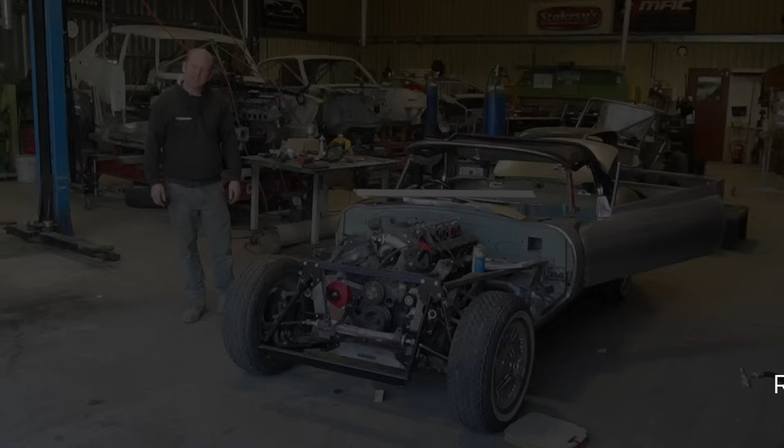We're going to start off with some E-Type today. Actually, we're going to quickly mention the lack of BMW E46 - we've got a gap because I am going to be trying to get working on the Reliant Scimitar very imminently. I was hoping to today, but in reality that's going to become tomorrow, so more of that next week.

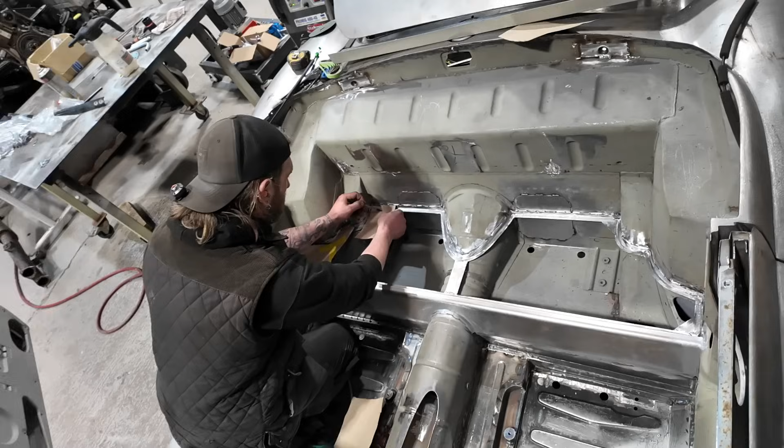E-Type - Matthew has been working in the rear seat area of this car because we've got to trim that area. There's no seats going there, it's just a trimmed area in the standard vehicle, and there's a sort of carpeted box thing that sits in there which doesn't look all that nice. We wanted to change that, add various other changes to that area, add some slightly more modern seat belts into the mix, and a bit of a sound system is going in there - an amplifier and an audio receiver, some speakers, and various other things.

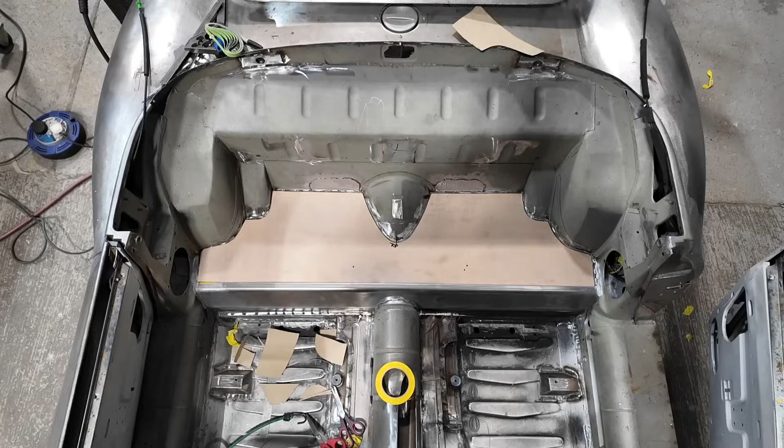So there's an area of fabrication involved there. Carl and I came up with a bit of a plan of how we wanted the front of that area to look and did a bit of a sketch. From that, Matt has fabricated the forward bulkhead to that little stowage area, that closed-in area, which would be where a rear seat would go if you had room, if you had people with no legs to go in there. Matt's done a beautiful job of fabricating the front of that.

He's then set a line around within the car using a laser set level to the top of the sills, because the car's not sitting level, but he set that level to the top of the sills to get the level, and then offset a line all the way around that area, and then welded in a return flange all the way around for a bulkhead to sit on.

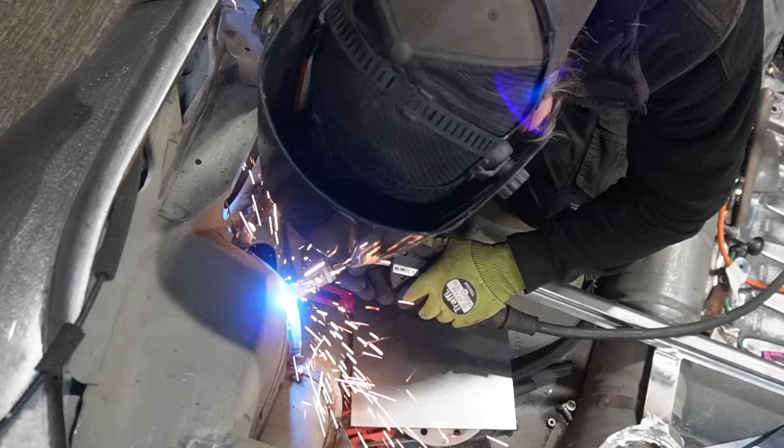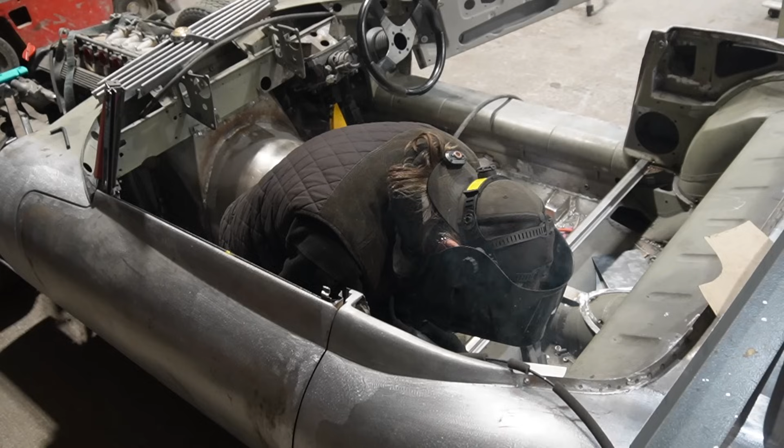He's then made a template for that bulkhead - made a cardboard template initially to get it roughed out, and then made that in some 5mm thick plywood, which is now the better template. That will be transferred in turn probably to some birch or hardwood ply, which will go in that rear area and form the actual final lid that goes in there that will be screwed in.

Then he has now revised the metalwork in the reinforcer gussets that kind of tie the back of the inner sill into the rear wheel arch. He's cut into those, and then we fabricated some quite heavy duty boxes into those out of 2mm thick steel sheet with 3mm thick reinforcing plates in to carry a seatbelt anchorage to carry the rear inertia reel units.

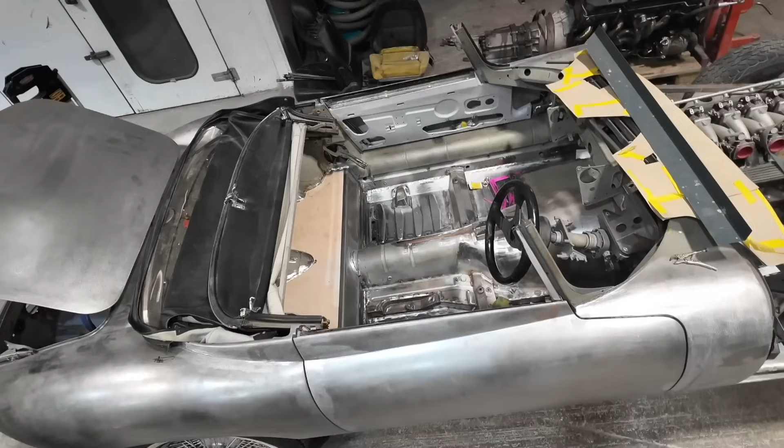These cars had a mishmash of seatbelt arrangements. In a very short period of time, they had non-inertia reel belts, lap belts, inertia reel shoulder belts, all of them fitted in fairly hodgepodge fashions, but they do have the lower seatbelt mounting points in. The upper seatbelt mounting points are varying degrees of unsatisfactoriness, if that's a word, which it isn't.

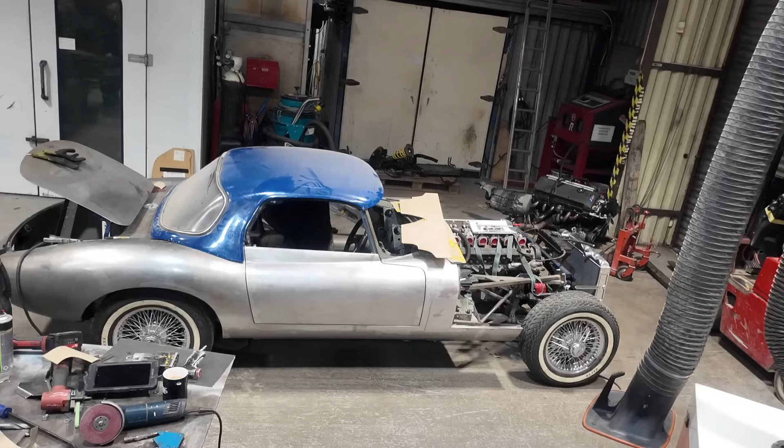So we are revising that slightly, and we are putting the inertia reels into that floor area, and then we're reinforcing the B pillar and adding a shoulder point there, because there needs to be a guide point there regardless. The inertia reel fitment points were a bit of a hodgepodge, and we've revised that, and we're fitting an upper shoulder point into the B pillar, adding some reinforcement in there.

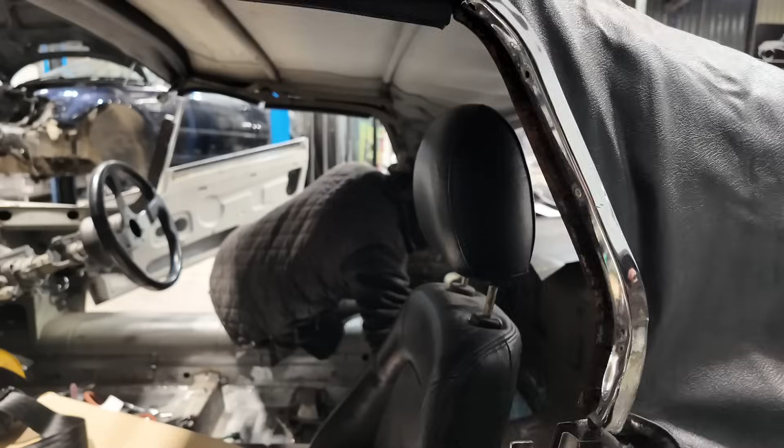We've got to be careful because the hard top also has a mounting point that goes in there, so we're fitting that just below where the hard top roof mounting point is, and we're having to avoid all of the soft top moving mechanism as well. So it's quite fiddly, but we think we've got a place where we can put that shoulder strap mounting point that we can reinforce to be of adequate strength, and that we can fit the inertia reels in a suitable place as well. It's all a little bit of a fiddle.

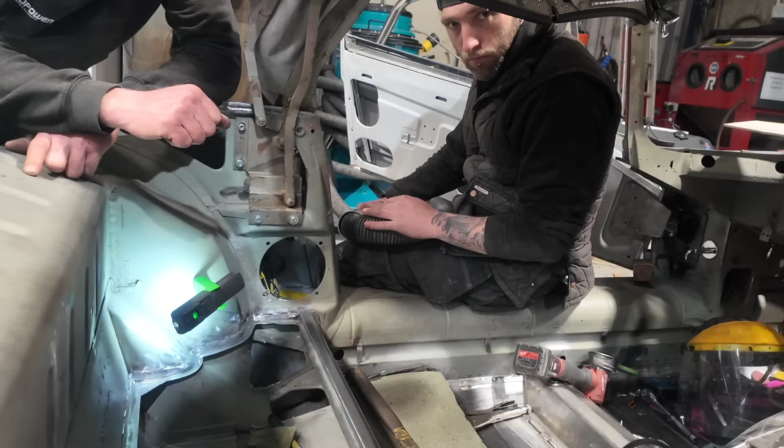I had to refresh my memory on pull test strength requirements for seatbelt anchorages. I've always had a number, I was saying to the guys upstairs, I've always had a number of 1.5 tons in my head, and whenever I've worked with these things - bear in mind this is largely fly-by brain cell design, not calculated generally on these things, because we're working with pre-existing structures, so they're very hard to calculate out properly.

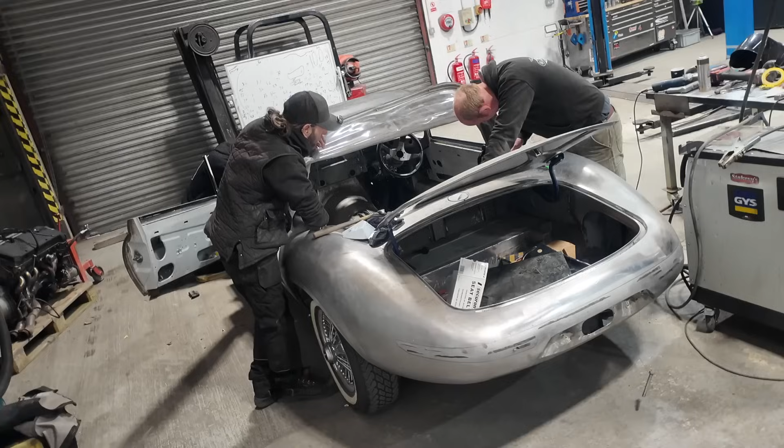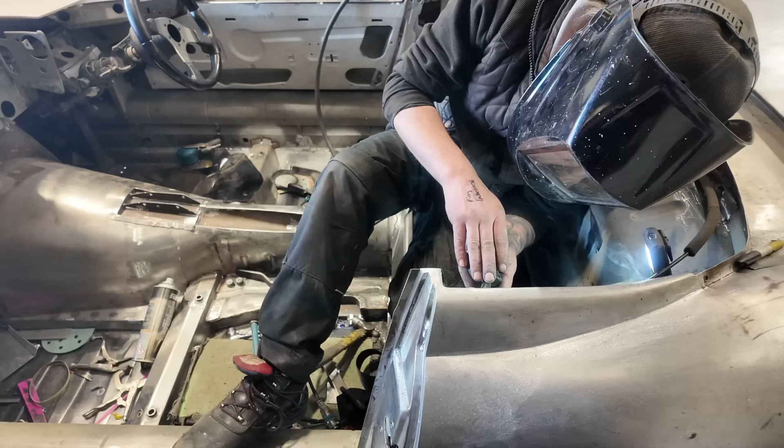I've always worked with 1.5 tons as a rule of thumb in my head, but I thought I better check properly on this. So I checked the EU type approval regulations, and I was actually slightly over - it's like 1,300 and something kilos pull test. It's an impact pull, so it's a sudden pull on the points.

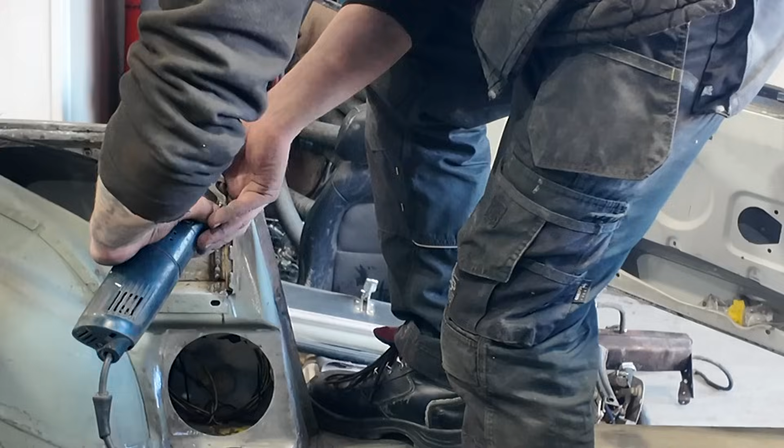The inertia reel mounts will be way higher than that - I'd say they'll withstand a pull probably upwards of 3 tons. The shoulder points, the B-pillars as they are, would definitely not withstand a 1300 or 1500 kilo pull. So we're adding a reinforcer at the bottom of that B-pillar, and some reinforcement at the top, which I think would enable it to take that sort of pull test.

Bear in mind, this is all a bit of a moot point in that the original E-Type is in no way designed to those requirements. The original body is in no way designed to any real crash test standards at all. You've got the roll protection afforded by the two hockey sticks at the front, and the car is certainly not built to modern safety standards.

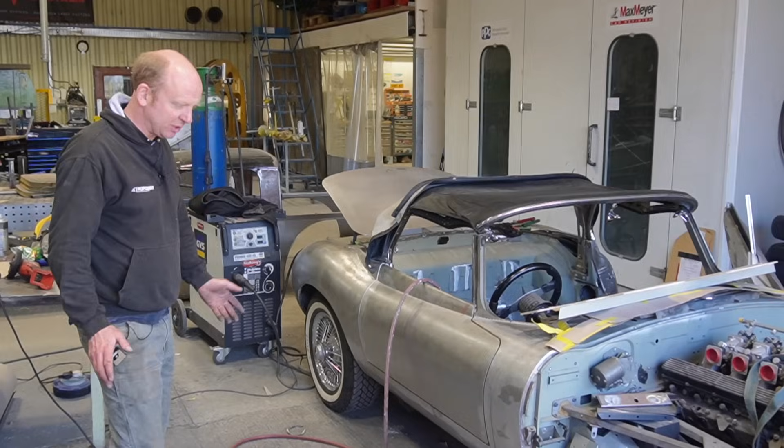But as I said to the guys yesterday, one of my thoughts is I don't want parts I'm adding to the car to be below par in terms of those safety standards. There's nothing to say what standard I have to do those points to, but my conscience says I ought to make them approximately what a modern type approval standard is. At least then I've done my bit - I may be limited by the vehicle around it, but at least I've done my bit.

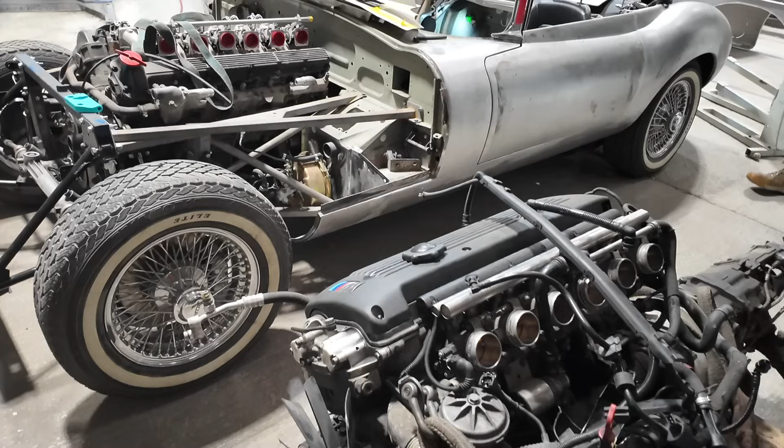So that's enough on that. Matt's doing some very nice fabrication there, and you'll see that develop as he adds the various further parts.

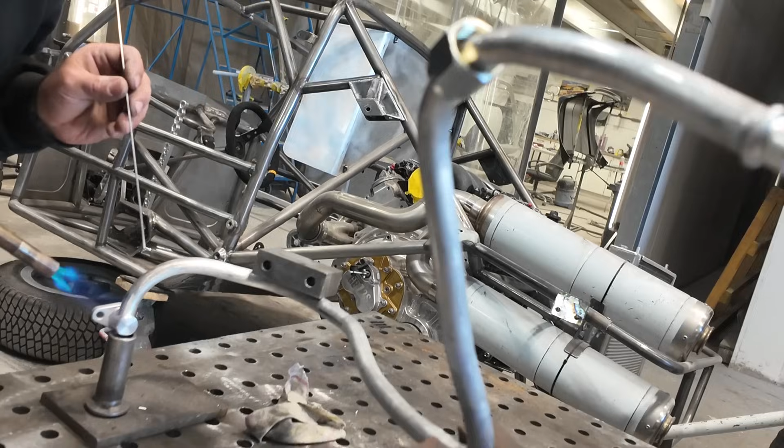Moving on from that, we come back to the Saab. Bobby is back - he's actually only just moved on to the Saab today because he's been finalising the aircon lines we talked about in previous episodes, and there's been some complications, not to do with his machine, but to do with the termination of the ends of those lines where we have to braze to them. We're on a learning curve, and Bobby's been doing research - we've discovered we're using a 6000 series aluminium for those lines, which is a readily available fabrication tube size, and I've generally used that for welded aluminium fabrications in the past.

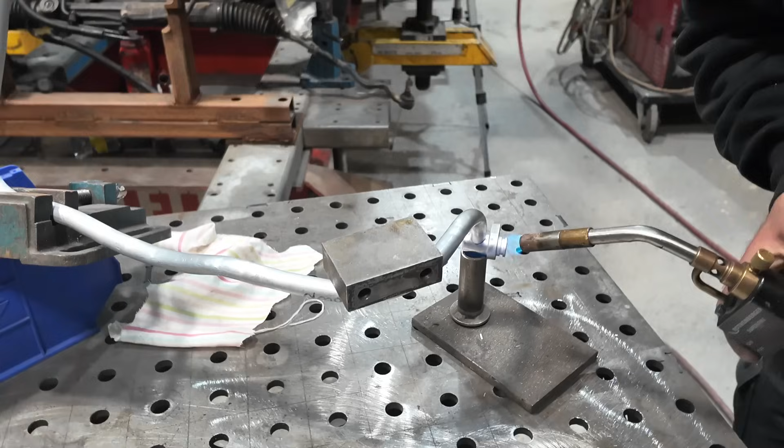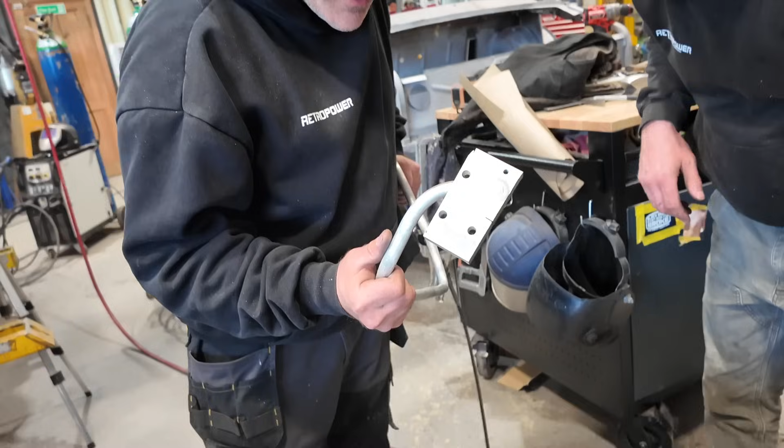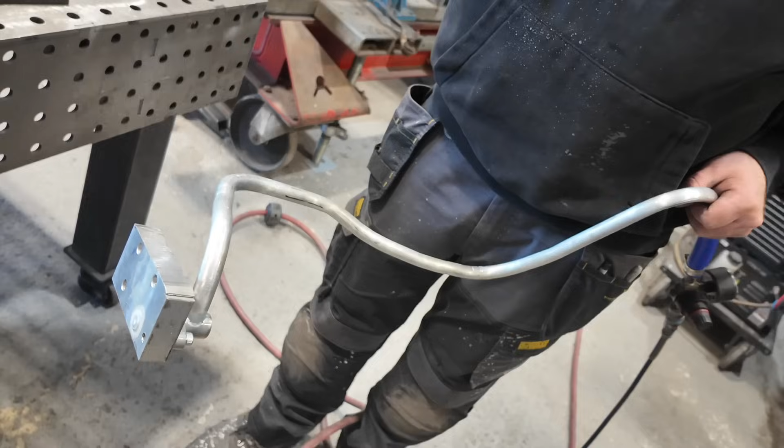What we're discovering is it's a bit of a pain to braze. We're using a zinc-based brazing rod designed for the refrigeration industry - Johnson Matthey makes some, and various other companies make them. Bobby's actually picked up off his own back, while he was having his teeth mended in Bulgaria, he'd done research and bought various zinc alloy rods designed for the refrigeration industry to trial, because one of the issues with the 6000 series aluminium is that magnesium comes out of solution and causes issues with the braze. This is one of the problems we've had - very, very tiny porosity, basically failing pressure test on outwardly perfectly good brazed joints, and he's had issues getting a repeatable good quality brazed joint on the ends of those lines.

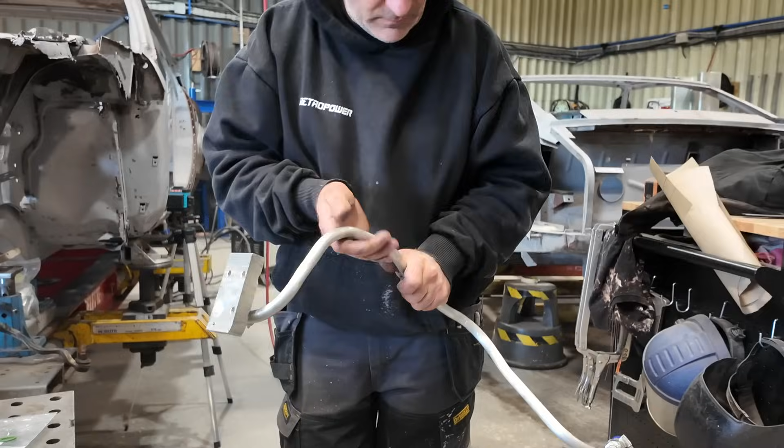We're talking sort of barely visible tiny bubbles forming at 100 psi pressure - very, very hard to find and very hard to get rid of. So we've been fighting a battle on that. He's fought the battle and won, but it's not a repeatable process yet, so that's something we still need to develop.

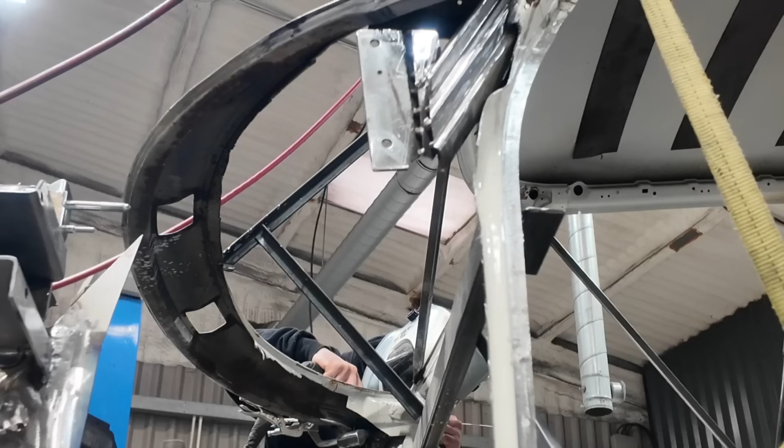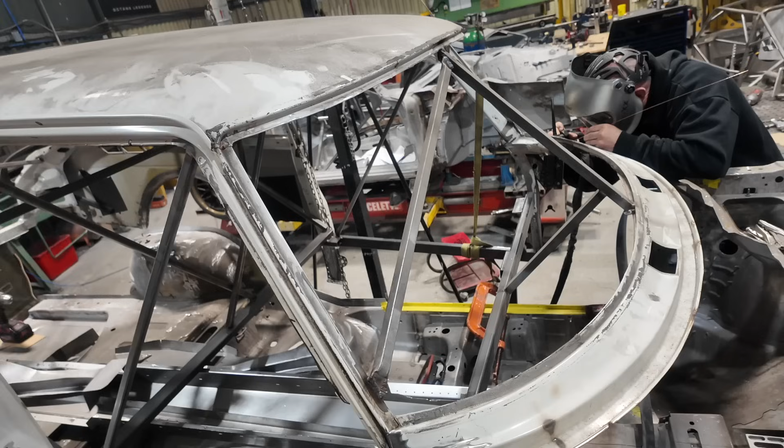Once that's fabricated on, move on to the next stages, which in broad and loose terms will obviously be finishing the pillar fabrication and the structural stuff that Bobby was working on anyway, and then determining where we're going to be flanging carbon fibre to steel around the quarter panels, removing the quarter panels, and then getting the CAD guys on with doing some more scan work so that we can basically sew in CAD the body surfaces to the mounting flanges for the rear half of the car. That'll be an exciting point to be at. So that's what's going on with Saab.

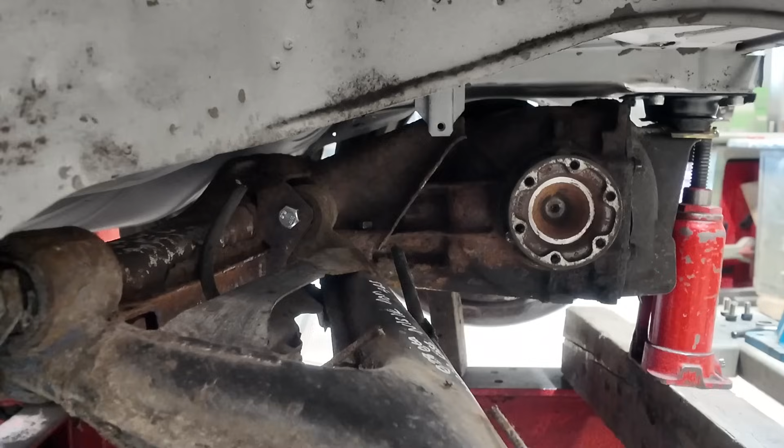E9: I think I mentioned last week getting the rear suspension components from Tim Pollock, which is good. We have those mounted, been a couple of to's and fro's and discoveries along the way, which I'm sure BMW gurus watching will say, ah yes, you will discover this. We've discovered that the mounting height for the 5 Series, E28 5 Series rear beam or subframe, that we're using is slightly different to the E9, so we need to put a spacer above the mounting bushes for that, which is not a problem.

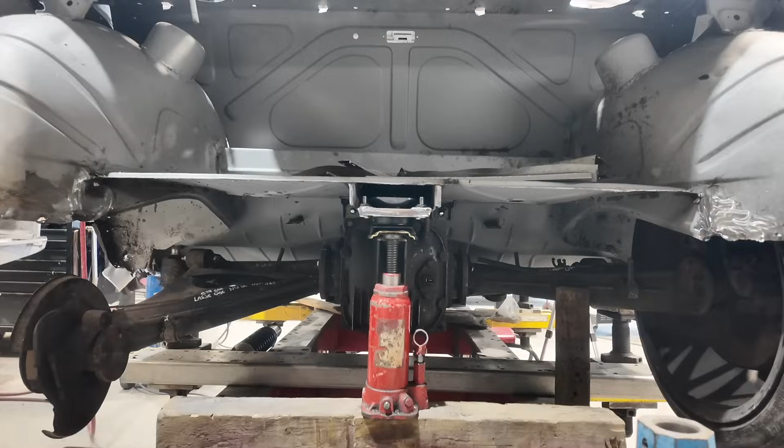However, it means that those mounting bushes are too long for the standard E9 rear subframe mounting pins, and I proposed that a good answer to that was to use an E30 rear subframe mounting pin, which is also common to many, many other BMWs, both large and small. It's used in various 7 Series. I think it might even be used in the 8s. It's used in various things.

However, there's a slight difference in the spline diameter where the splines that press into the body fit. Now we can get around that, but we need to check everything else works. We may have to make some little adapters and weld them in for the spline ends where they attach into the body, unless, leaning on the hive mind of our viewers, any keen BMW specialists in our viewership know of a BMW beam mounting pin that presses into the body that has the same dimensions in the body as the E9, E28 type pin, but has the length of the E30 type pin. I don't know if there is or not. If not, we can either make one or probably make a little adapter to adapt the E30 one to the E9 body. Not the end of the world either way, but it'd be interesting if there is an off-the-shelf part from BMW. I couldn't see one. It seemed to be one pin or the other, and there didn't seem to be a third variant as far as I could see for that type of fitment, but you never know.

But anyway, that doesn't really stop us doing anything. Stu's got that rear beam mounted, got it set to the height where it will need to be in advance of us making those spacer pucks that have got to go in. Got everything set up and got the swinging arm on this side set at ride height.

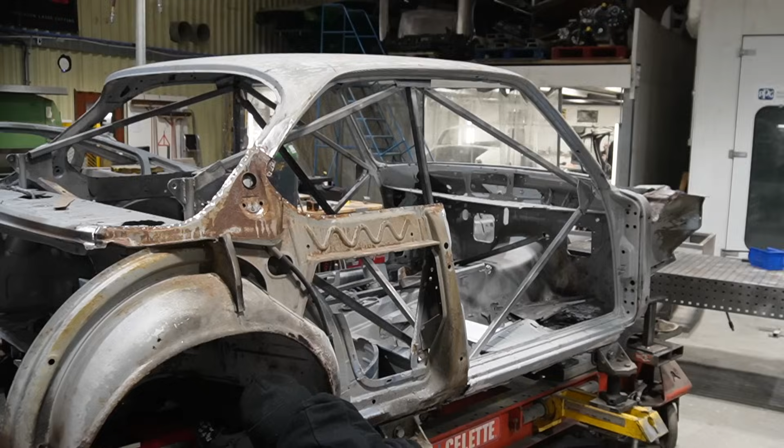He's just chucked one of the wheels off the E46 BMW on, got that set at ride height so that we can determine at ride height the exact wheelbase from the centre of the rear wheel to the centre of the front wheel. And then earlier in the week, went round and round and lost some more of my hair that I haven't got very much of. Stu hasn't got any left anyway, so he can't pull his out.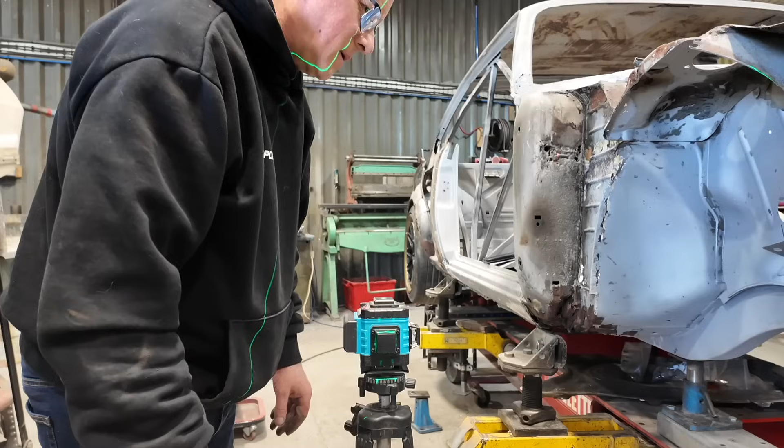We've worked out the exact positioning of the front axle centre line mathematically, using the BMW dimensions from the E46 to the structural points on that to get us the axle centre line, because none of the jig drawings I can find and none of the information anywhere online gives me the actual axle centre lines for the E46. I can get any body repair dimension I want, but none of them tell me where the middle of the wheel should be, which is a pretty fundamental problem, and I would have thought that should be in that information, but none of the jig drawings I can find have that.

But anyway, we've established that. Stu's marked it on the chassis, worked out where the subframe mountings have got to go to get the axle centre line in the right place, and then we can transfer that to work out exactly where the strut tops have got to go so we can start fabricating those.

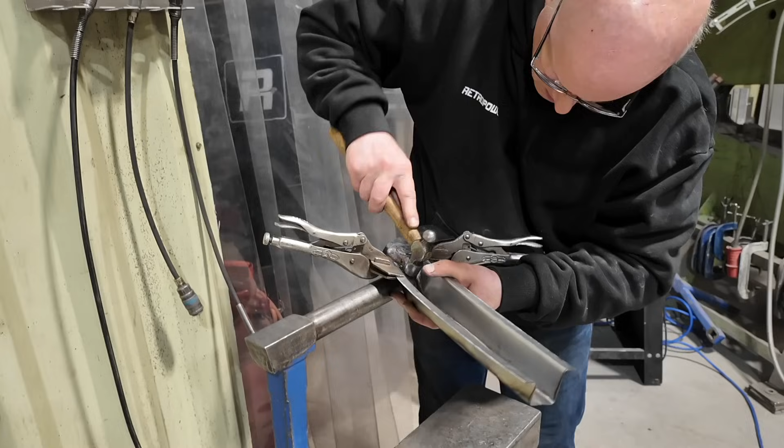All of that is great. Whilst waiting for parts to do some of those things, Stu's also moved on to repairing the rear inner scuttle panel, the panel at the bottom of the rear windscreen, which we're replacing, but the underneath panel we can't buy. And it just so happens to be the world's most complicated shape.

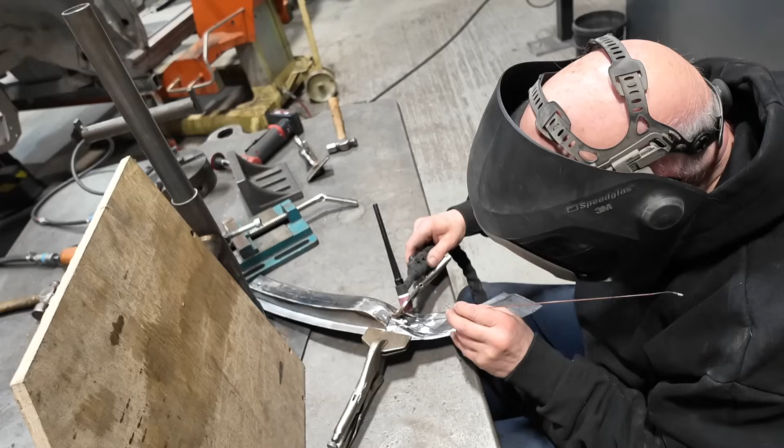I think it's probably, and I'm going to kick myself for saying this, possibly the trickiest shaped piece of metal on the entire car that we're going to have to make. Fortunately, it's only a reinforcer panel. It goes inside, you can't see it, so the exact accuracy isn't that important. All that said, Stu has done a very nice job of copying the shape of the original part, but it does look like somebody wanted to make some origami the day they designed that bit of metal, considering it's just a drain channel and reinforcer piece.

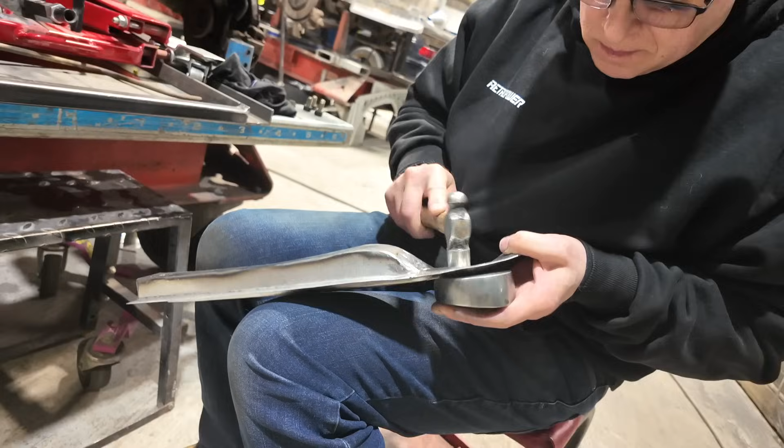But Stu's done a lovely job of making that piece. I don't know if he's actually welded it in yet or not. Looking at the car, by the staining I can see from here, I think he probably has welded it in. But yeah, he's got that piece done, certainly ready to weld in if it isn't actually welded in.

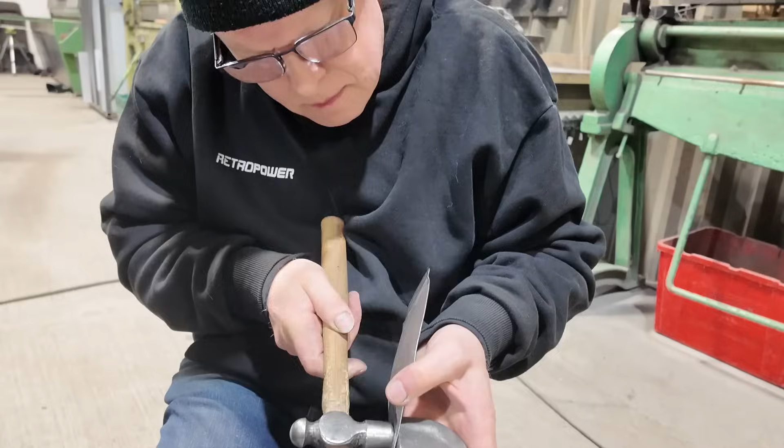And we are still waiting for panels because UPS, who are delivering those panels, their parcel delivery centre appears to have a floor set of two feet of treacle, and they don't actually seem to be able to move anything on and get it to us. It's sat at UPS, has been sat there for around a week, and trying to get motion out of that parcel appears to be very difficult.

So hopefully we will have some panels very soon. If UPS come along, please deliver the parts. They're all paid for, customs charges are paid, everything's dealt with. For some reason, it seems to be impossible to get them here. Hopefully they'll be here soon. And that's where we're at on the E46.

The Aston, there is nothing to report this week because of CAD things and because of me needing to do things which I have not had time to do. I basically need to review drawings. Cal and I need to review drawings.

However, we're doing some very exciting things related to Global Workshop at the moment as well, which I don't know if Cal's going to talk through with you. If he doesn't, we will be doing at some point soon. But yes, there's lots of planning of things at an overall level going on. And that's been absorbing quite a lot of our time, so we've been a bit limited on time to review drawings and do things like that.

The other job I've been doing, which is again not related to that and not related to things here, is a few jobs for the den to get caught up with some fabrication work there. As you're aware, the cut-off line we have on work at the den is that we do not do fabrication work on site. That is the line we've cut off. It's a very simple line, so we will not take on welding, rust repair, that type of work at that site. That's an agreement,

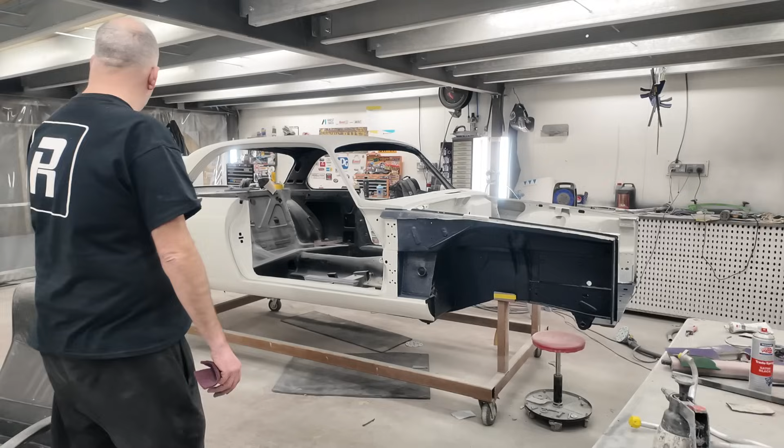Also, me and Gaz have been on with the Jaguar, so this is the final bits now. We're just doing all the detailed stuff. This is 320, we block this, 400. That's ready now - we've just got to go around, check everything, check for stopper, like some little pinholes, just make sure. Check it over. I think all the panels are ready apart from the back panels and the wings, and then it's like sealer time in the booth and then paint. So on that note, I can't say anything else more, so see you next time.

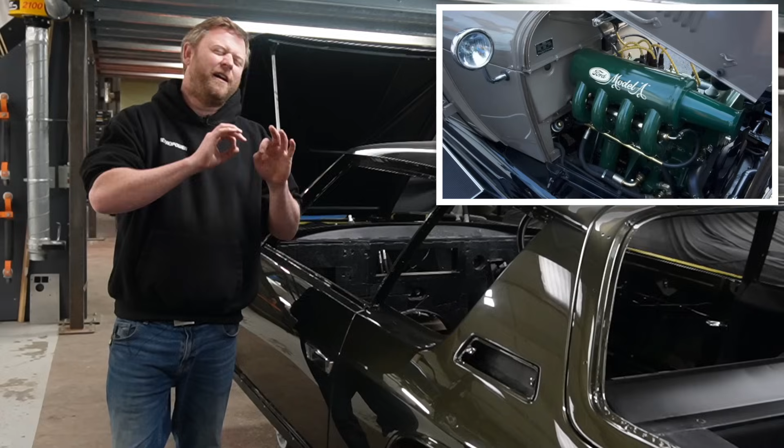Then moving on a little bit, there was a Model A Ford built by a company in Finland called Mäkelä Auto Tuning. I think it was built for Juha Kankkunen, and it's absolutely incredible. It's totally done to look like a Model A, but it's essentially like Group 4 running gear, a BDA in it, but made in incredible detail to look like an old flathead 4-cylinder. It's got this amazing fabricated airbox. The plug lead tubes have got a fake spark plug on the top, so it looks like it's got old school spark plugs sticking out the top with the wires screwed on. Dry sump tanks in like the leather luggage rack on the back. It's just an incredible thing. So I'll put a link to that in the description.

Probably more recently, Roadster Shop's Grand National build - seems to have been a spate of Grand Nationals built in the States. More recently, Ring Brothers did an absolutely awesome one, and the Dutch boys did as well. But Roadster Shop kind of led that little trend, and particularly the interior on it is just a masterpiece. At a glance you're just like, yeah, it's a standard interior, and then the more you look, the more detail you see, and the lengths they went to with things like the displays and the graphic design on them - it's just an absolutely stunning build, one that's really understated in a way. So yeah, those were my 3.

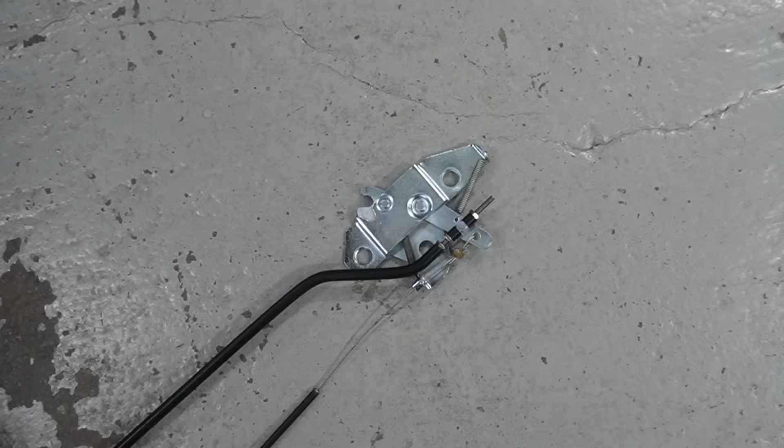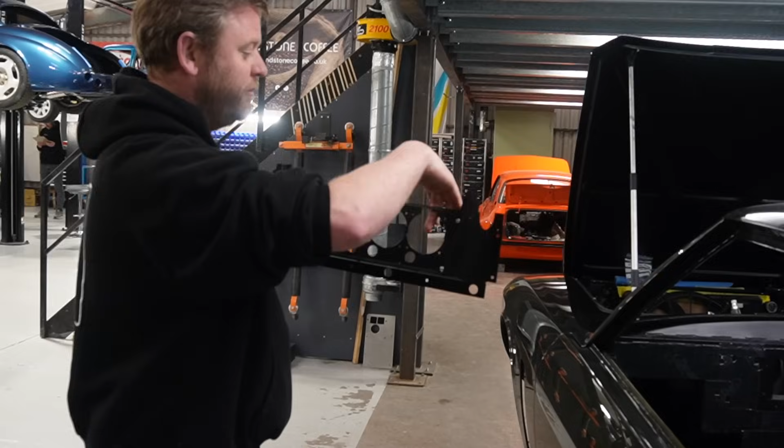Right, Interceptor. So we're just cracking on with assembly work on this. We've got the bonnet latch assemblies now in - we've zinc plated the actual latch mechanism, and then there's a link tube that goes between the two, which has been Xylan coated. We're looking at some of the air ducting fitment now, so parts that we made during dry build. So this is the plenum that goes on the inside of the bulkhead. There's a 3D printed adapter that adapts to the central 2 vents, which are fresh air straight from the scuttle, and then there's more 3D prints that adapt the outer 2 vents, because these are going to have the Bentley organ stop vents in them, that adapt them to the HVAC unit. So starting to get stuff like that in place.

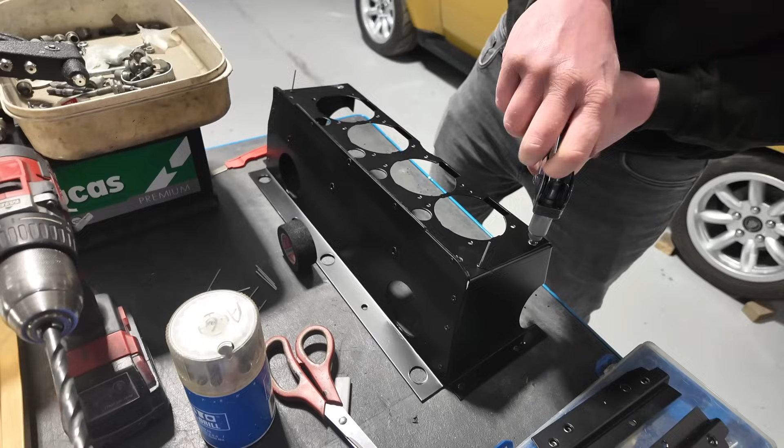That'll allow us to get the scuttle vent in, and then we can get the duct that we've got - there's a fabricated duct that sits under here, we can bolt that in. The wiper mechanism's all in now as well. So yeah, it's just starting the build-up bit - it's kind of the fun part when you're bolting shiny bits onto a shiny shell. So that's Interceptor.

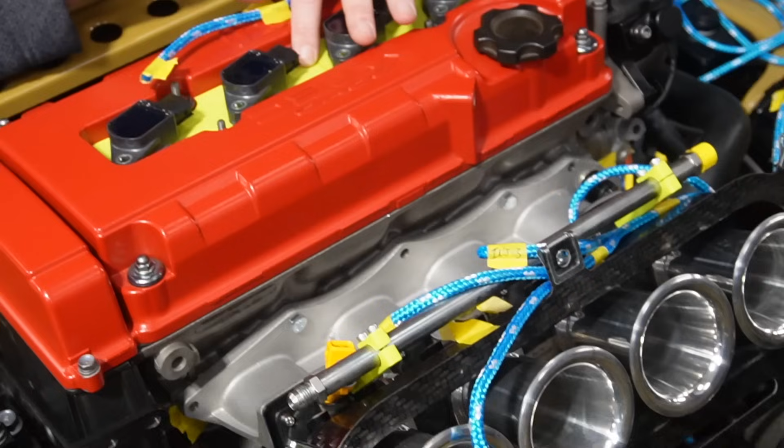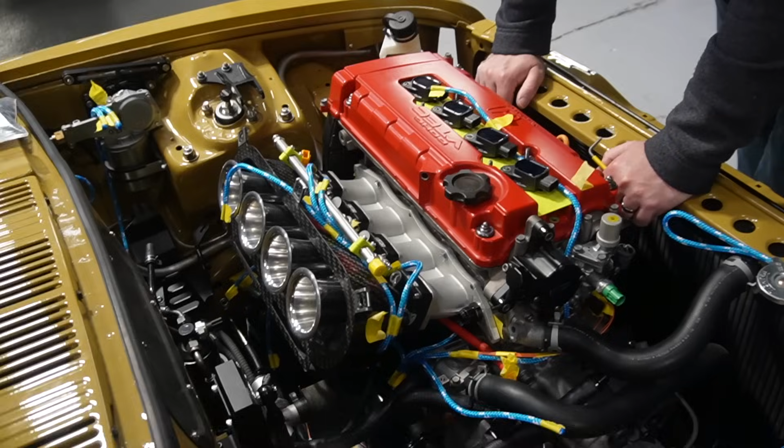People will have noticed that Bobby was missing the last couple of weeks - don't worry, he's just on holiday. He has been doing the air conditioning hardline fabrication using the crimp tool of his own design, and it's strangely therapeutic.

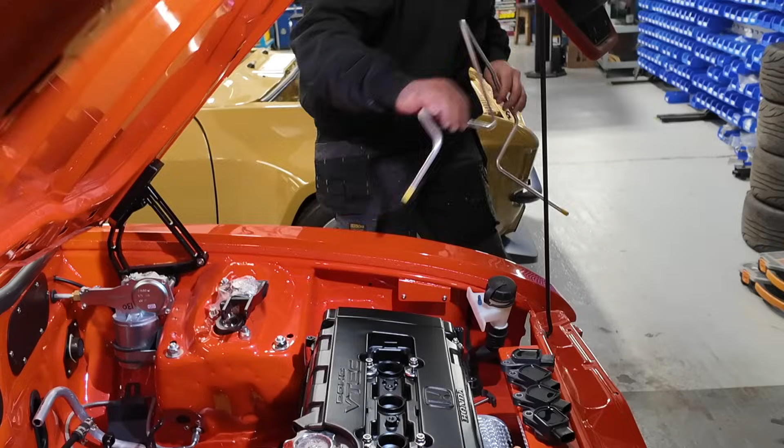Well, thank you, Bobby, for your therapeutic hardline fabrication. What other channel gives you such a thing?

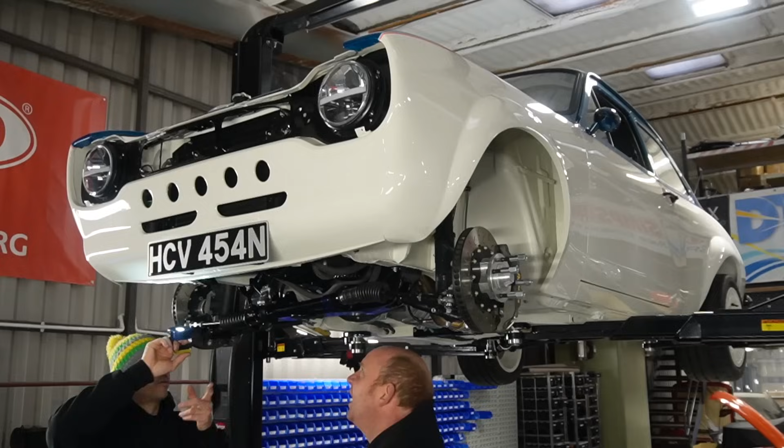Right, Project Kuma, we're just in the spanner checking stage. So we got the engine and box back in, ran that up, dropped the coolant out, ran it up to try and get any remaining oil residue out of there. The oil cooler we tested outside of the radiator because it's got a water to oil heat exchanger in it, and that didn't show any leaks. So we can only come to the conclusion that there was somehow oil contamination in the coolant, and we don't know why, but everything does seem okay now on that.

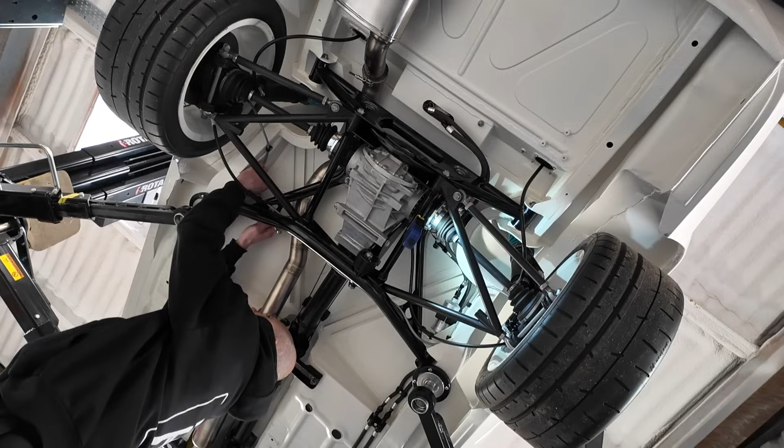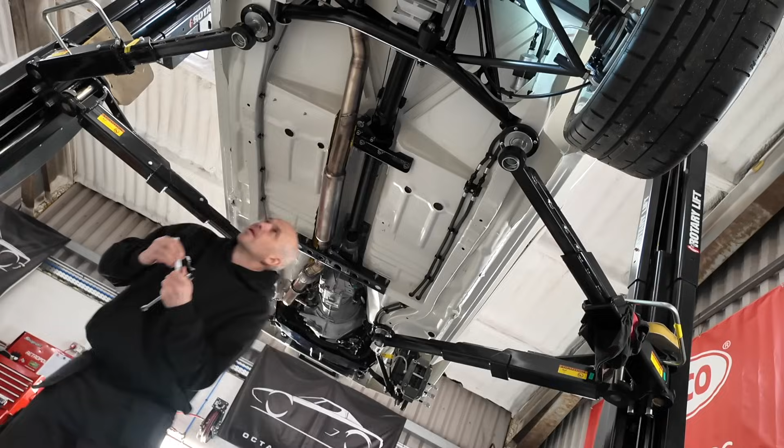So we've run it up to temperature again. We're just going through doing the final spanner check. In the very latter stages before road testing, we have a check sheet, and any safety critical fasteners are checked by two independent individuals and ticked off. They have a sort of colour coordinated paint marking system on the bolts, which can then be referred to later to see if there's any movement, but also to show that those bolts have been checked. Everything's photographed as well with those paint marks on, so we're just going through that process now with a view to road testing. Very, very close on that.

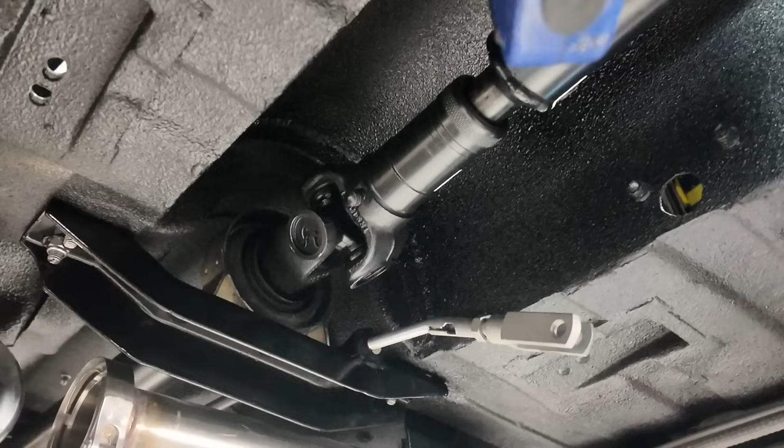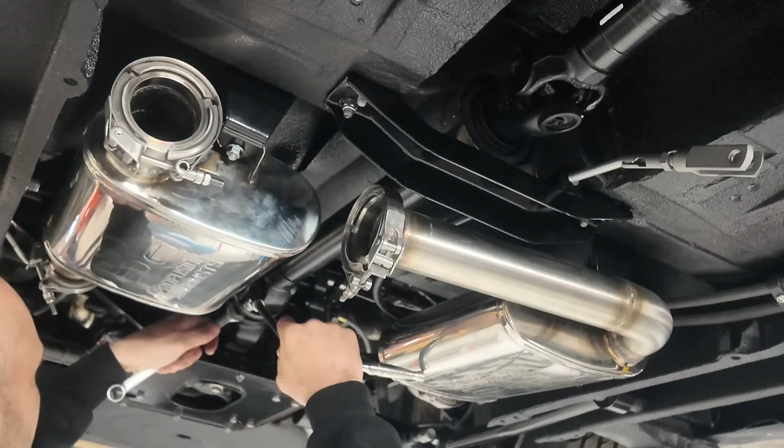And then Project Churchill, we've just had the prop shaft back from being made, so the driveline is basically complete. I can't spin the wheels anymore, they are attached to the transmission for the first time. Zircotec are just about to do the ceramic coating of the exhaust manifolds for this, which will then allow the whole exhaust system to go in, at which point mechanically we are getting pretty close. We need to have the coilovers made still, and obviously the final wheels, but yeah, it's good progress on that.

Moving on from that, I've been thinking about CAD then. George has largely been on with the Aston DBS chassis, going through all the final tweaks and changes. Fair credit to him, he has designed an entire chassis and all of the suspension, drivetrain and all the related parts - it's quite a big task, so it's easy to miss things. At this point in proceedings, Nat and I basically go over the drawing, look at the model, and try to brainstorm any things he might have missed because there's so much to think about.

So I've done a review of that chassis already. He's gone back and done a load of changes on it. Nat will now do a review as well from his point of view, so we bring two different points of view to it. Mine will be more of a mechanical assembly mindset and his will be more of an engineering mindset. He'll be looking at things like material thicknesses, load paths, that sort of thing, and I'll be looking at it from a can we physically put it together point of view, largely.

So following my review, there were a few changes, a couple of things that spring to mind. We realised on the front wishbone, I think it was the lower wishbones, you wouldn't actually be able to fit the bolts. They're fitted in the model, but one of them at least didn't have a path to actually get it out because there was another reinforcer plate behind it. So I made some revisions there. The diff basically goes up from underneath - there's two bolts in from the front, one in from the back.

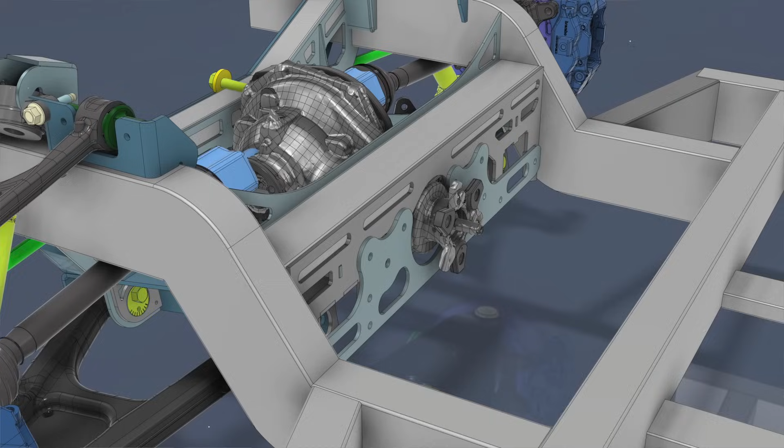I was concerned that the chassis was dead flush against the mounts, and any powder coat buildup or discrepancies in the exact dimensions of the chassis could make it incredibly difficult to slide that diff up into place without damaging paint. So we decided to kick out the chassis section behind it and give it a few mil clearance, then have a shim in there. You put the diff into place, put the front bolts in, then put the shim in and the final bolt at the back, so if it's fractionally tighter due to slight discrepancies during fabrication, we can just resize that shim. That was a good move.

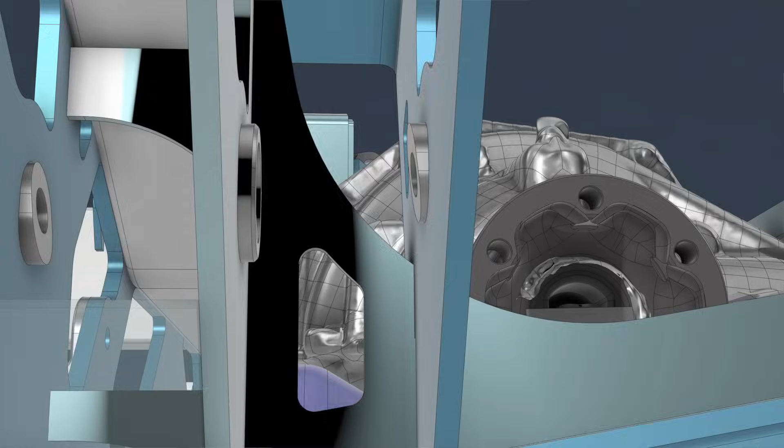We've also decided to change the rear suspension arm mountings so we can use either C6 or C7 rear end parts. This has generally been based around Corvette C7, but we realised the upper ball joint on the C7 rear upright is incredibly close to, or probably slightly touching, a 17-inch wheel, which is what we're hoping to use. The client wants to avoid the hot rod look and keep it fairly classic. Having done a few renders, going over 17-inch starts to look too hot rod. It's an option to go to 18 on the back, but we'd rather go with 17s.

For 17s we need to use Corvette C6 parts, which are very interchangeable, but one of the location arms mounts in a different way. We had a look and realised that with a few changes, we could make it so the parts interchange and fit either C6 or C7. So our intention is to build it with C6 - we've got all the C6 uprights and arms - but it leaves the possibility of upgrading to 18-inch wheels and using C7 parts if, further down the line, we decide to supercharge the engine for more power, want bigger brakes or stronger parts. We have no concerns about using the C6 stuff with the specification as it stands. That was another change.

So Nat will be reviewing that next, and then we're going to be sending a lot of parts for laser cutting and starting to build an enormous Airfix model. Luke's been on with a couple of things.

We've just been revisiting the front end of the E-Type, chopping and changing ideas regarding the air intake at the front. On a Series 3 originally there's quite an ugly, boxy scoop under the front, and we want to maximise the amount of air going through the radiator without compromising that intake. We also need air intake at the side, outboard of the radiator, to feed the engine air. Originally that air is kind of stolen from what goes through the main grill aperture, but we want separate intakes, so all the air through the main aperture and whatever scoop we come up with goes through the radiator, with additional intakes for the engine air.

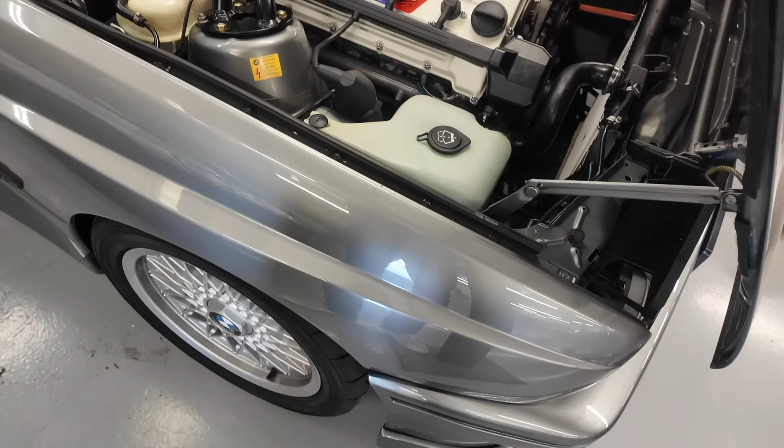So the E30 M3 is awaiting some parts, but the inspection on that was more or less as we expected - the thing is absolutely pristine, but there were just a few little things. There was a perished exhaust hanger, the belts could do with replacing - not mega urgent, but that's one thing the client mentioned he'd like doing. There was a little bit of wear on the dizzy cap and rotor arm, so we're going to do those as well. We're just waiting for some BMW parts.

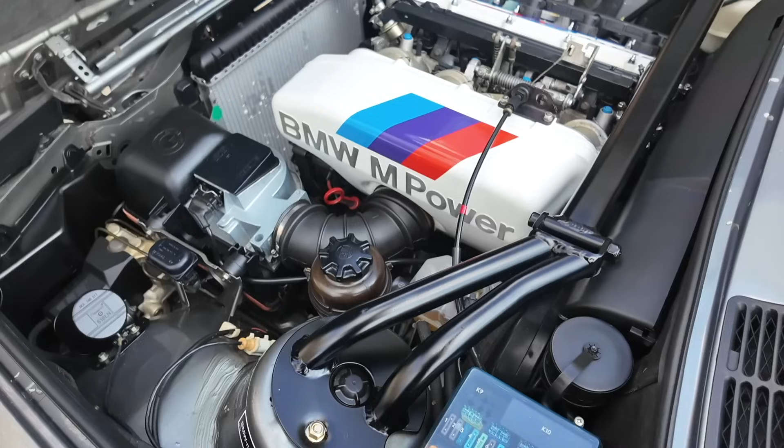There's also a sort of gripe amongst E30 owners who are at the fussier end of the scale, myself included, that the stereo originally sits just mounted flush and doesn't look like a very integrated part of the fascia. There's already an existing, I think 3D printed, version of that part of the centre console you can get that allows the stereo to sit a bit more recessed. So I think the customer's got one of those on order, which we're going to fit. But yeah, it's a relatively small job list on that.

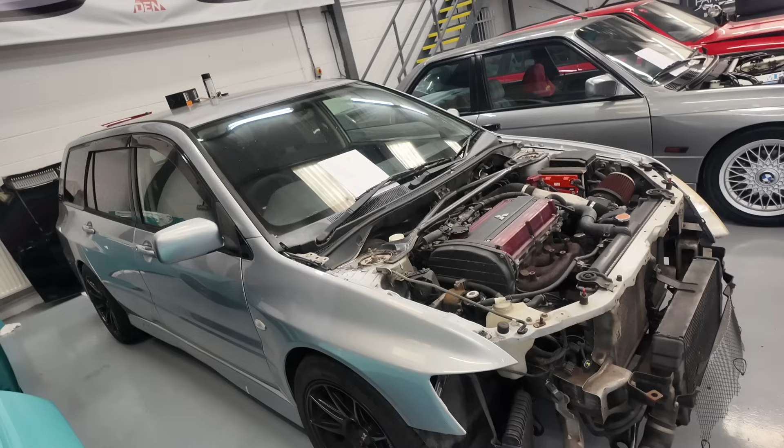Next to it is this Mitsubishi Evo wagon, which is Nick's own car, which he's bought, I believe, to do some work on, possibly sell at that point, although I can guarantee by the time he's done all the work on it, he's going to actually want to keep it. What he thinks is he's going to make a profit on this, or at least that's what he's told his wife. What's actually going to happen is he's going to find a string of problems on it, because it's quite obviously not been used that much, and he's going to pile more and more money into it, and eventually make a huge loss.

But incredibly cool car. I did a little teaser on the rear of this the other day, guess what car it is, just a little vent that sits next to the rear light. I love the look of these - I actually prefer the look of the wagon to the saloon, and they're just not a common sight, so it's very cool to have that in the workshop. There was another one doing the rounds around here, I used to see it on the road every now and then, and every time I saw it I was like, oh, I really want one of those.

So that's that - Mark III Golf. A few bits going on with this. The customer's decided he wants to tidy up the engine bay a little bit. The aluminium cam cover is just a little bit scabby looking basically, so we're taking that away. We're going to bead blast that at Retropower, clear Cerakote it, which should make that look brand new.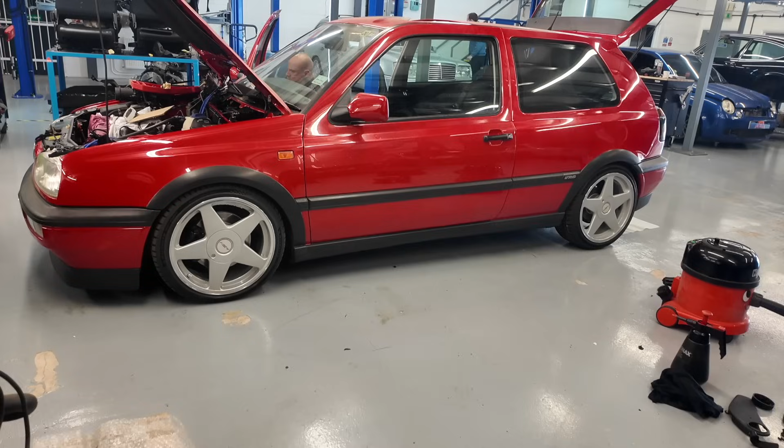It's a really good tip actually, that there's a Cerakote product which is specifically designed to go over bare aluminium castings and completely preserve their look, so they still look like a bare aluminium casting, but you don't get that surface furring with moisture that you get over time, that for instance the engine bay of Nick's Lancer has.

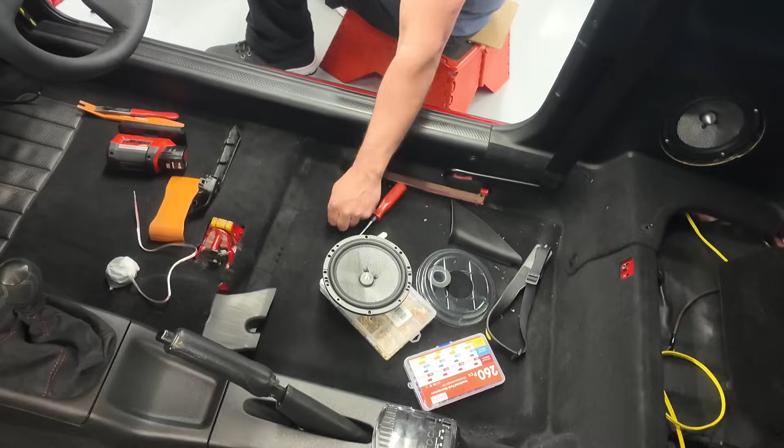Audio system going in, so I think we've got Focal 6.5 inch components in the front with the tweeters going into the original locations in the dash, and Focal 6.5 inch components in the back. I was actually quite surprised to see, and it's a very cool feature on these, that they had originally a tweeter mounting position in the back for the rear seat passengers as well, which is something you do not expect to see on a car like a Golf. We're making use of those, and then it's running a Pioneer amp and a very small active Pioneer subwoofer in the boot to try and make the most of that installation.

There's a lot of sound deadening mat going in, which Luke's been working on. Looking forward to seeing all that go together, and then we'll have the new seats that the customer's given us to fit in this. It's going to be this is definitely one of those cars, as with several in here, where when it's done, I'm going to be like, yeah, I really want that car myself.

And then the Mercedes, which is about ready to hand over. Nick's had it on here to do the alignment, and he's just got to do a final road test on this. But as a bit of a project recap, because it's quite a cool example of what we can essentially say yes to at the den.

And originally it came in for a reupholstery, so it was full leather originally. Customer wanted to change that, wanted to go with an original OEM Mercedes cloth, which we managed to source for him on the seat centres, then extend that onto the trim panels on the door cards and dash, which were originally wood. Then on the centre console, he wanted to change from the original wood to a satin black painted finish, which we did with a clear matte lacquer, so it doesn't scratch easily.

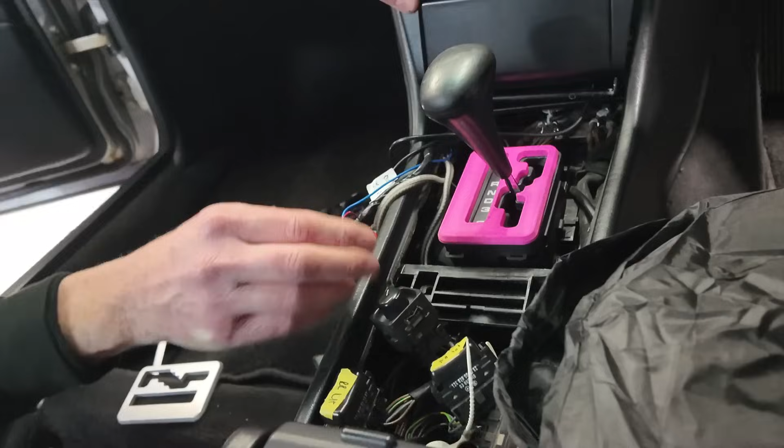And then a few little things. We noticed it had just come here fresh from an air ride conversion, and the controller, airlift performance controller, was just kind of on the seat on the end of its wire. I said, it'd be cool to have that in the ashtray, and he said, yeah, that would be really cool. So we did a little work there, installed that into the ashtray, designed a 3D printed part, so now you pop the ashtray open and that comes out, has the airlift controller on there. You can reconfigure those controllers to work in either orientation, so originally portrait, but we've changed that to being landscape.

And then, and this was a cool one, gear shifter, originally wood. He decided it would be really cool to have a green malachite ball as the shift knob. So he actually gave us a box with some of those gear knob balls in. Nick perilously did some diamond core drilling to drill a hole into one to bond a thread into it. And then we at Retropower designed a stick that was then machined by Andy at Concept 303 out of stainless steel, which had a little bit of a kind of, if you like, tulip flare at the top, so we could get a bit more area supporting the ball and actually bond it as well, so we weren't entirely relying on the threads. Got all that installed.

Also the gear sort of shift gate surround, which was originally wood as well. Customer said, could you machine that from billet? And yes, no problem. So we designed that, drew that up, had that machined, anodized, put that in. So now it's got some really, really cool touches inside.

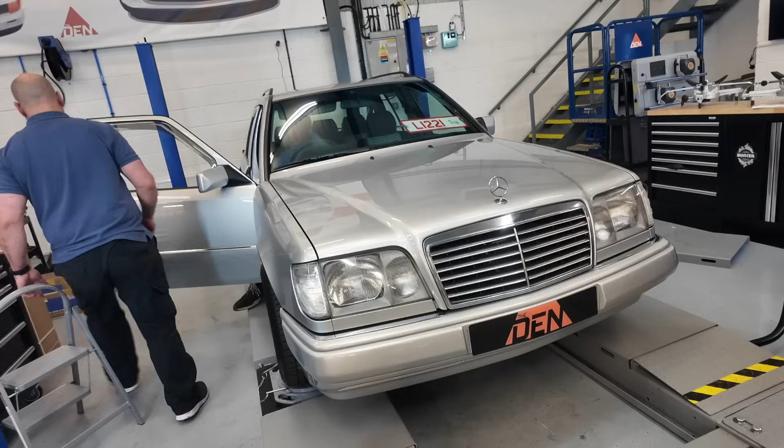And then while it was here, there was various mechanical bits to go through on the car as well. So some of the exhaust was starting to break down, so it's got a new OEM Mercedes middle box. We've done a modified rear with a Lorinser tailpipe on it. We've fitted the Lorinser wheels that he supplied.

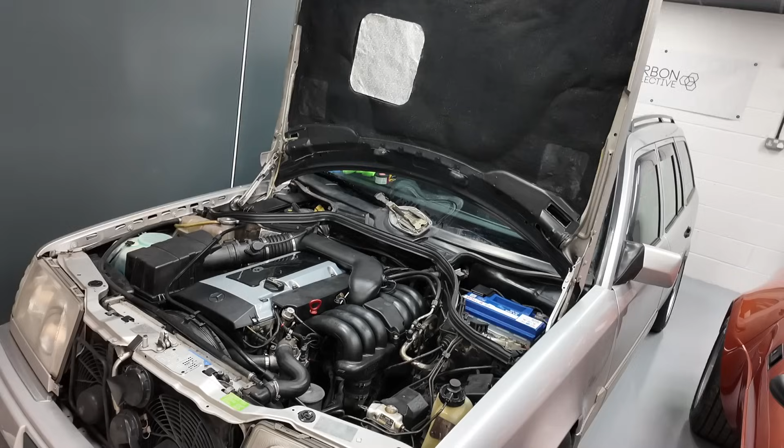We took the cam cover off, had that blasted and powder coated. There was an issue with the airflow meter, so that's been replaced. I seem to remember there was some kind of fuel line issue on it as well, and a few other little mechanical things to go through on it. So yeah, started with our basic inspection and an instruction to do the upholstery.

Ended up being a sequence of very, very cool touches, and what's turned out, I say it way too much, is a car that I would absolutely love to drive myself.

So Mercedes W124. And then the other thing that's been going on down here, which is equally as cool, is the interior that is going into what I've now called the business, after the same SL500 in the same colour in the Danny Dyer film of that title. So Richard is working on the interior for that car, and it's looking absolutely sensational. I'll hand over to Richard now to show you what he's been up to.

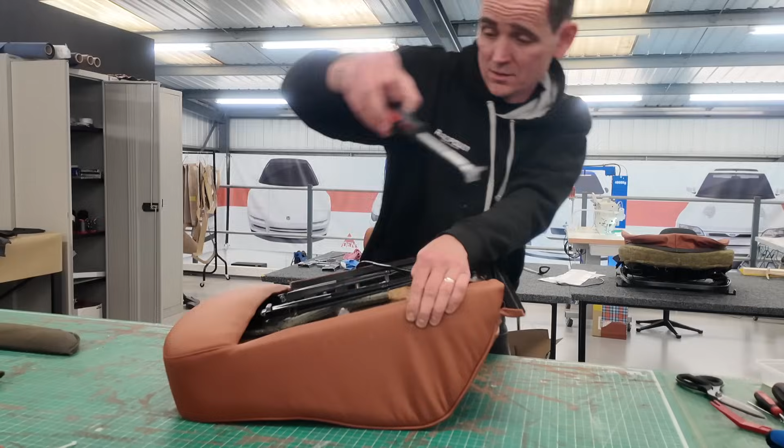We did a small, not a repair, a clean job. The seat was actually stuck in the rails, and it was all the grease that was packed up and dried out, and it was so stuck that it physically couldn't move. So cleaned that out with a bit of thinners and washed it out, scraped all the hard bits out. So that's sliding forwards and backwards now. Just got to put it in a car and then see if that actually works, if it wasn't something else that contributed to that as well.

But that's nice. So now I managed to sew both seat covers in the end, and as you can see, there's a seat cover. So it starts off like that, and then with a whole lot of clips. Because we changed it, I had to make a little bit of changes.

Originally it wouldn't have this tie down strip here at the bottom. So what I do is I go with coated string really, and I put a couple of strings through, and I put it through the pad, and then I just button them down just to make sure that cover holds, because previously, with the way they did the fluted design, was they did the tuck and roll, then the foams get stuck in, but it would be laminated with a type of material, like a calico type of material, and then they actually glued a couple of strips down, and then it just gets hog-ringed or glued right around the frame, and that's how it was kept in place. But because I've done away with that, and I don't need this massive piece of calico, I decided I'll just put some tie downs and button them through to make sure the seat will stay.

So you can slide in and out of the seat as much as you want. These two lines will never move. There was some fastenings originally, so I'm happy with that.

So rest of today and tomorrow, it's hopefully today, fingers crossed, finishing off this seat. This is the driver's seat. Then I can put them in the car. Maybe you guys will see a sneak peek of it. And then it's onto the door cards. And then we are done.